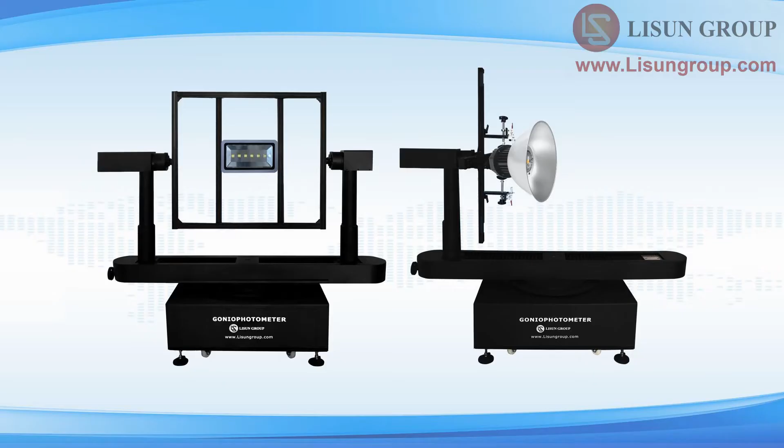Let me introduce to you the installation and use of the LSG-1890B High Precision Rotation Luminaire Goniophotometer. The following is the video catalog. 1. System installation. 2. System adjustment. 3. System calibration. 4. Measurement.

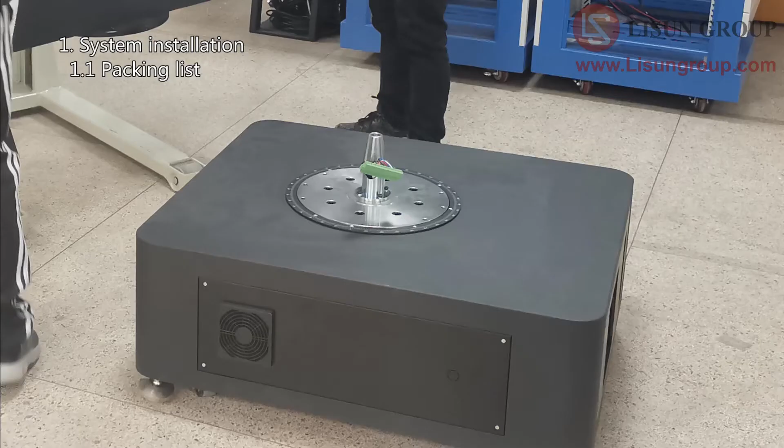Please check the packing list when you receive the shipment. There are 6 boxes in total. 1 box contains the base of the goniophotometer. 1 box contains the turntable of the goniophotometer. 1 box contains the clamps. This is the C-gamma clamp. This is the E27 holder. This is the B-beta clamp.

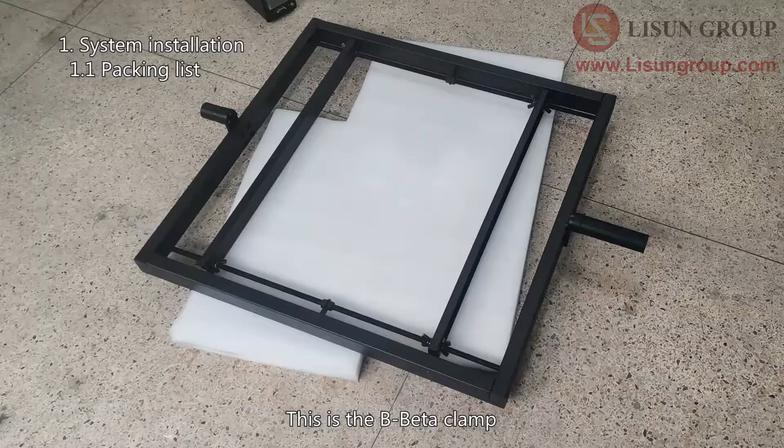1 box contains the cabinet. 1 box contains the AC power source. 1 box contains the DC power supply. All the other small devices and accessories are contained in the boxes described above. Please carefully open all the boxes. Take out all the devices and accessories.

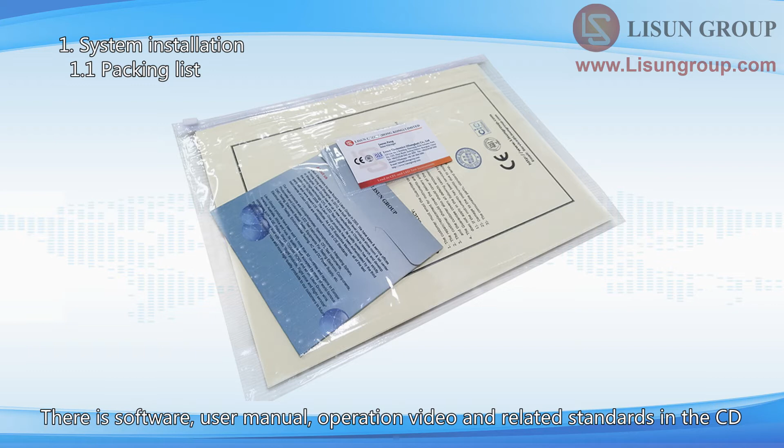There is also a plastic bag in the package that contains a CD, calibration certificates, and guarantee cards. There is software, user manual, operation video and related standards in the CD. Open the back door of the cabinet. There is a wiring diagram on the door.

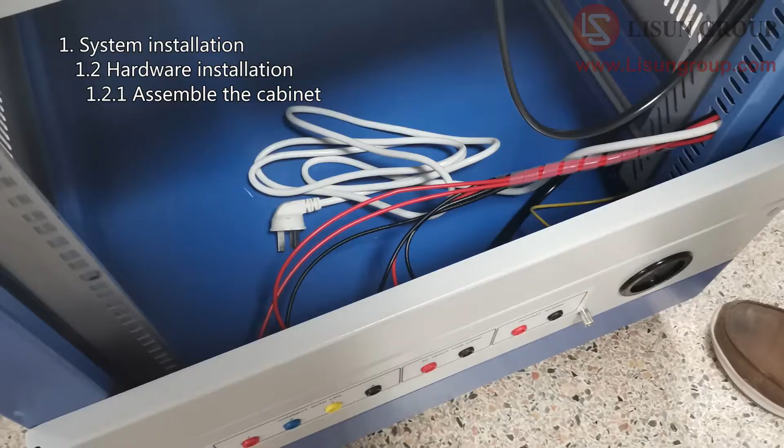Put the digital power meter, rotary actuator controller, DC power supply and AC power source into the correct positions of the cabinet. Here is the power cord for the cabinet. Put it through this hole. There is a fan on the top of the cabinet. Plug the power cords of the fan, digital power meter, rotary actuator controller, AC, and DC power sources to the power strip inside of the cabinet.

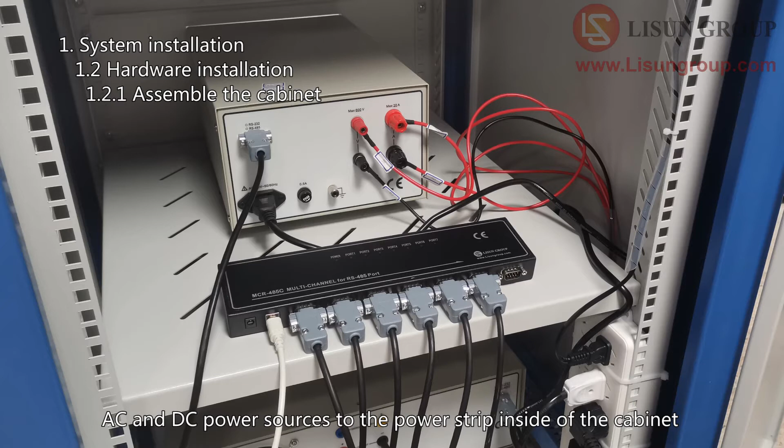Connect the 4 wires to the 4 terminals on the back of the power meter according to the wiring diagram. Connect the communication cable to the communication box. Connect the output lines to the back of the DC power supply. Pay attention to the positive and negative poles. Connect the communication cable to the communication box.

These are the AC power output lines. Connect the output of the AC power source to the cabinet. Connect the communication cable to the communication box. Connect the communication box to the computer using the USB cable.

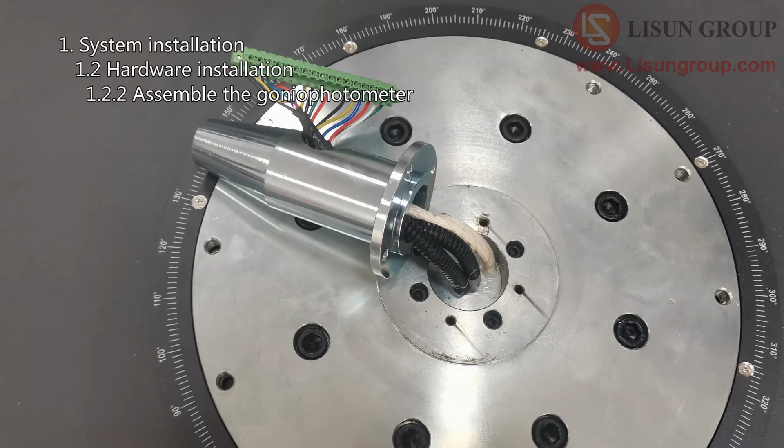There is a taper sleeve on the top of the base of the goniophotometer. The sleeve and the base are engraved with one same number. Make sure the numbers are in the same direction and fix the sleeve to the base using the screws. Open the dust cover of the turntable. There is the terminal bar under the dust cover.

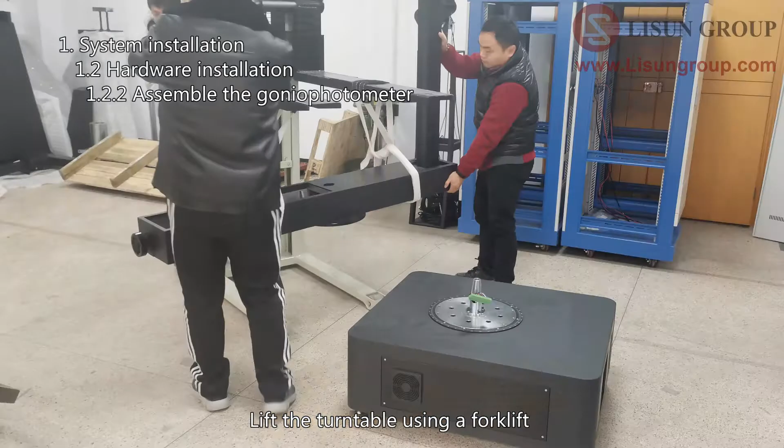Lift the turntable using a forklift. There is also a terminal bar out of the taper sleeve. Make sure they are in the same direction. Put the turntable down on the base slowly. Protect the terminal bar of the sleeve and make sure it goes through the hole successfully.

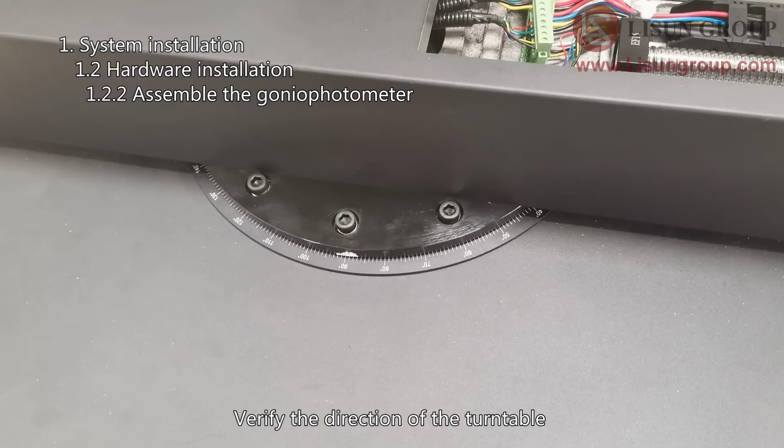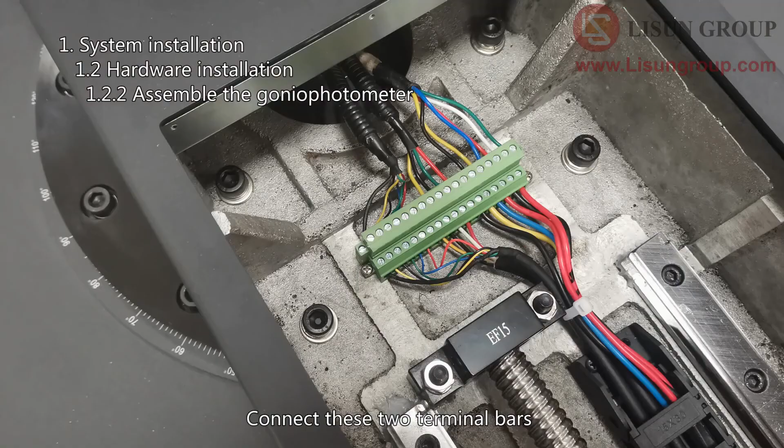Verify the direction of the turntable. Make sure that the 6 screw holes correspond to the base one by one. Fix the turntable on the base using our screws and gaskets. Connect these 2 terminal bars. Put the dust cover to its original position. Move these 4 feet up.

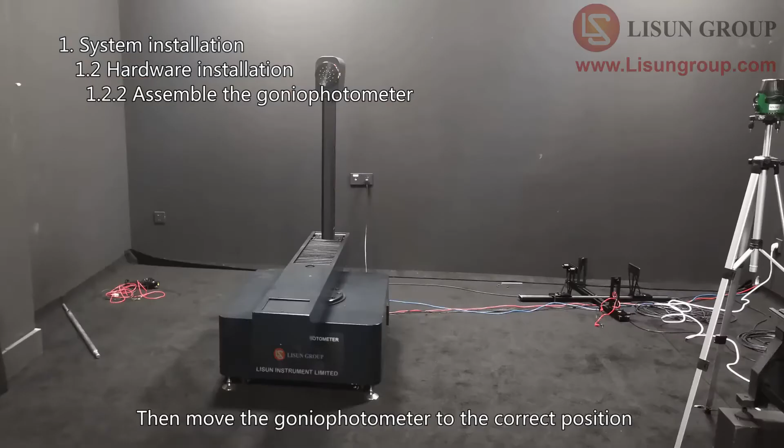Then move the goniophotometer to the correct position according to the darkroom drawing. Try to keep the sides parallel to the wall. The side with the word faces the photo detector. There are 4 terminals marked with numbers on the back of the cabinet. They are used to connect with the goniophotometer.

These 2 terminals are connected to the power strip inside of the cabinet. It is used to power darkroom equipment, including the goniophotometer and photo detector. Then you can control the power supply of the entire system on the cabinet. Connect the grounding terminal to the ground. This is the photo detector and its holder. Assemble it and put it to the correct position according to the darkroom drawing.

There is a 1-to-2 communication cable for the goniophotometer. Connect the RS485 port at one end to the goniophotometer. The other end splits in two. Connect the end with RS485 port to the communication box inside of the cabinet. Connect the other end to the rotary actuator controller inside of the cabinet.

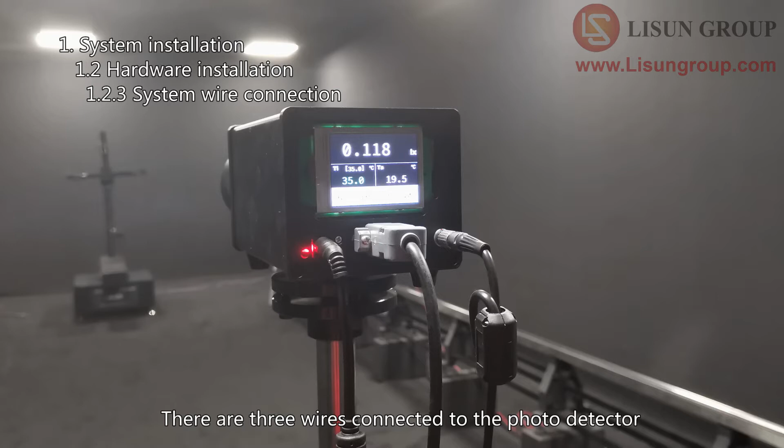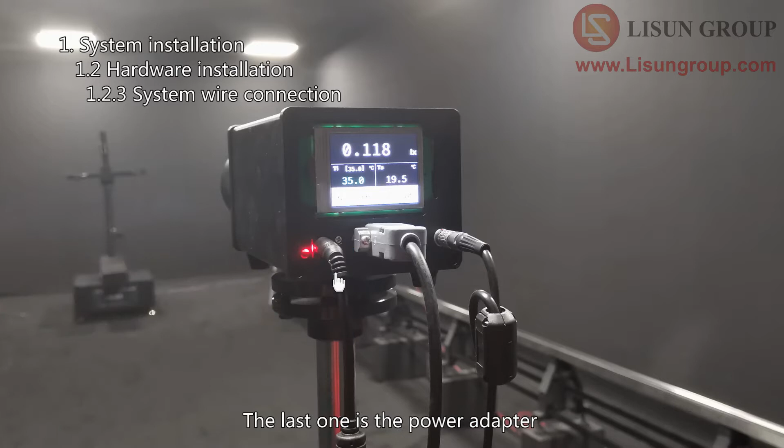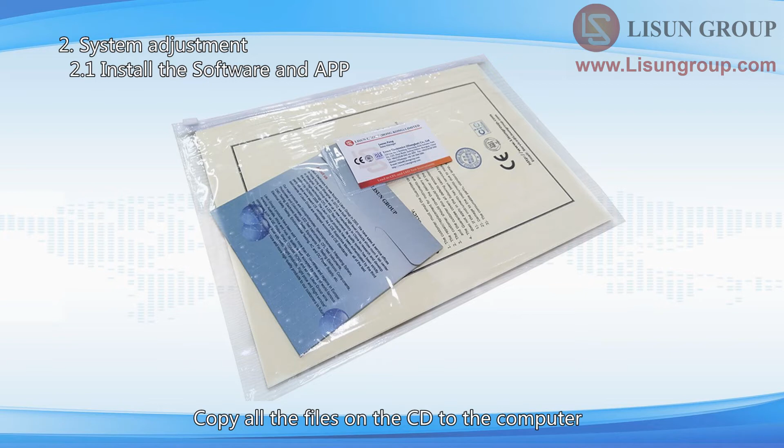Turn on the system. And make sure that all the devices in the system are turned on. Copy all the files on the CD to the computer. Double-click to install the goniophotometer software. Double-click to install the driver for the communication box.

Copy the APK file to your Android phone and install it. Turn on the Bluetooth function of the phone. Open the app. Click here to connect the goniophotometer. The app is used to rotate the goniophotometer, but it can't run a measurement. The function of the app is the same as the rotary actuator control panel of the software. Let's take software operations as an example.

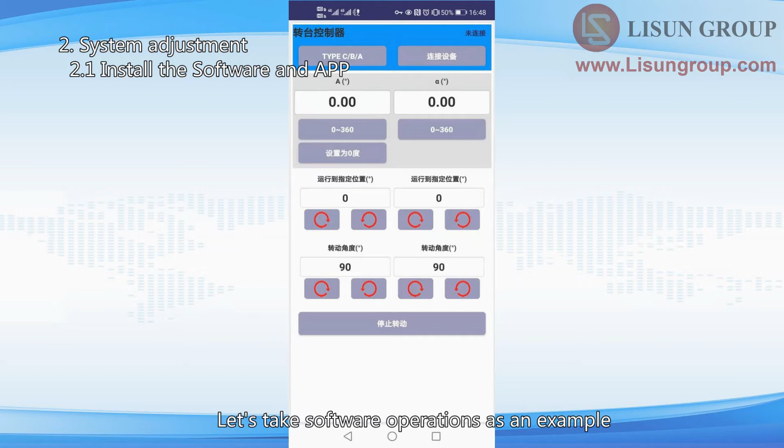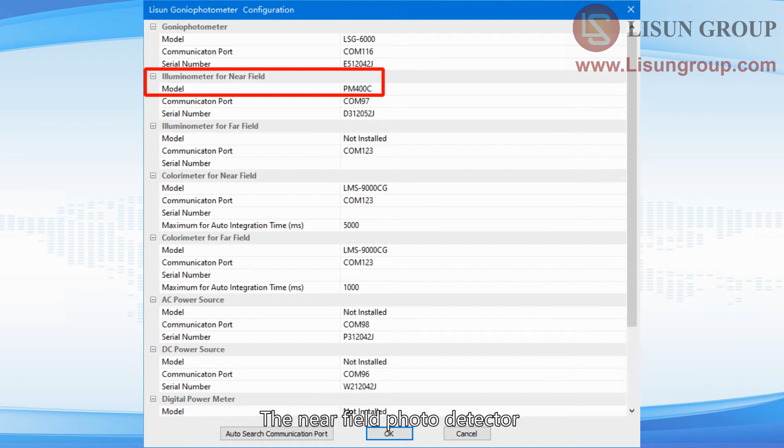When you run the software for the first time, it will automatically enter the configuration interface. Choose the correct models for the devices. The goniophotometer, the near-field photodetector, the AC power source, the DC power source, the digital power meter.

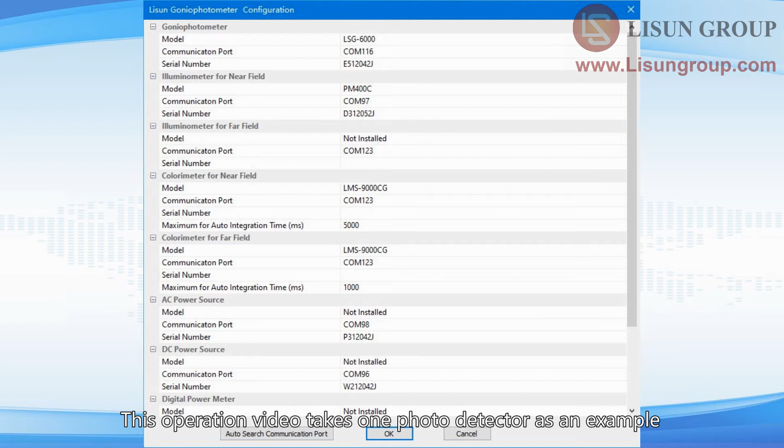If you only have one photodetector in the darkroom, the default is near field. This operation video takes one photodetector as an example. Select Not Installed for the far field photodetector, the near and far field spectroradiometer. Click Auto Search Communication Port when all are selected correctly.

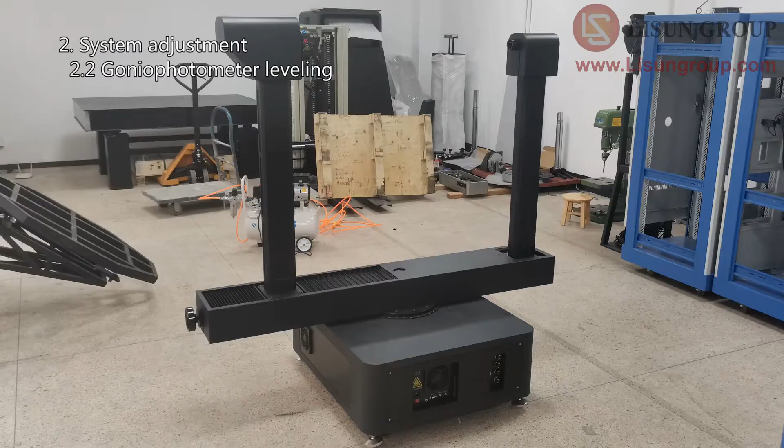After successful configuration, a window to save the file will pop up. Please choose the path of the file, and input the file name. This file is used to save all the test history. This arm of the goniophotometer is the auxiliary arm. Remove it. The other one is the main arm.

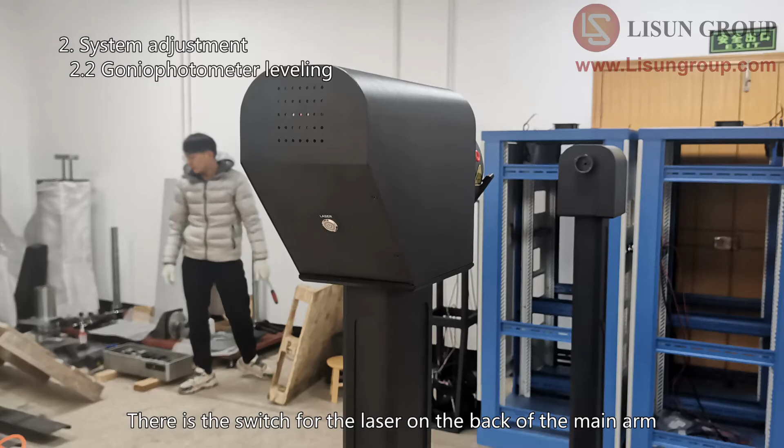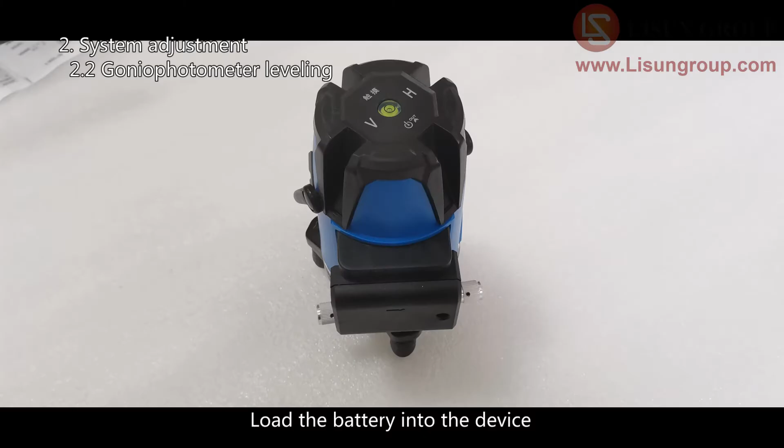There is the switch for the laser on the back of the main arm. Turn it on. Then you can see one laser coming out in front of the main arm. There is a cross laser device inside of this box. Take out the cross laser and its battery. Load the battery into the device. Turn this switch to unlock position. Then the cross laser will be turned on.

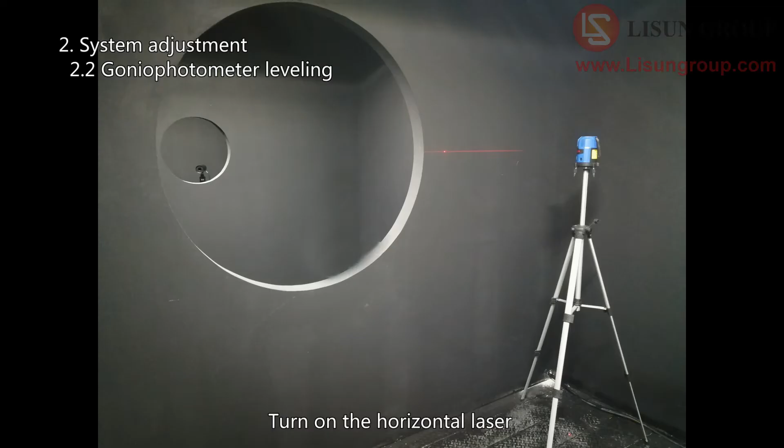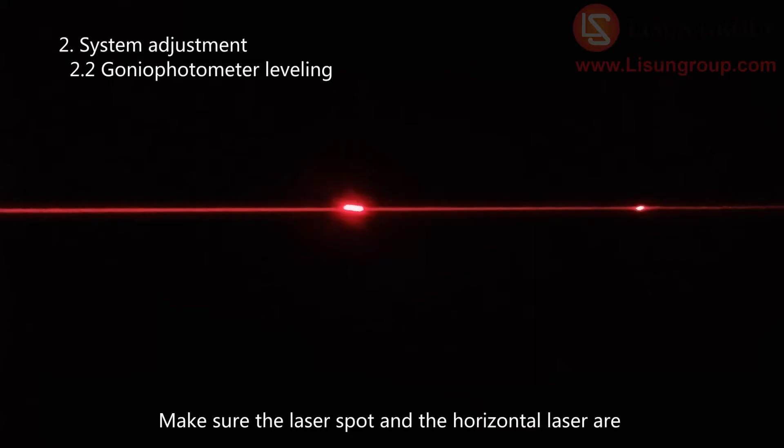Click Rotary Actuator Control Panel. Choose Illuminometer for near field. Click this button to make it rotate continuously. Then you can see the laser spot moving on the darkroom wall. Now you need to rotate the screws to adjust the height of the 4 feet of the goniophotometer. Make sure the laser spot and the horizontal laser are completely coincident within the range of 360 degrees.

All the 4 feet need to touch the ground firmly after the adjustment. Sufficient patience is required to adjust this step. Click the stop button to stop the rotating after the adjustment. Turn the screw up to secure the feet. Choose Illuminometer for near field.

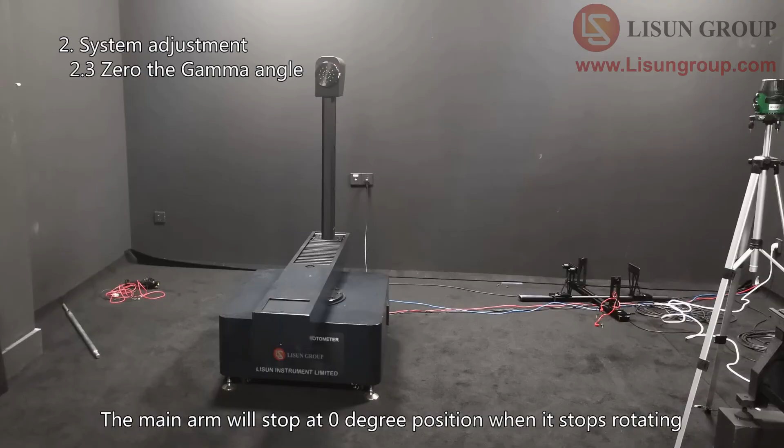Input 0 here. Click any one of these 2 buttons to rotate the goniophotometer. The main arm will stop at 0 degree position when it stops rotating. The laser should go through the center of the hole of the partition. If you have more than one partition in your darkroom, just refer to the last one.

If the laser is not in the center, please input a small number and choose a direction to rotate according to the actual situation. Make sure the laser goes through the center of the hole. Then this is the real 0 degree position of the photodetector. Click Set to 0. The password is LISUN group. It displays 0 at gamma angle after setting 0 successfully.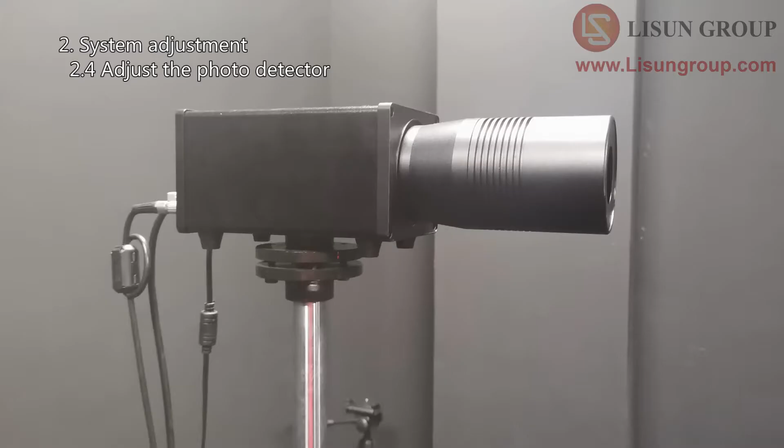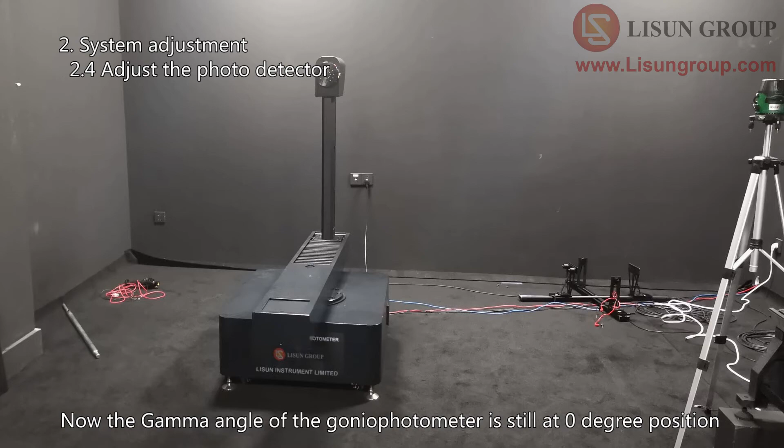Screw down the sleeve of the far detector. Install the mirror tool. Now the gamma angle of the goniophotometer is still at 0 degree position. Please adjust the position of the detector holder, the height and direction of the detector. Make sure that the laser from the main arm of the goniophotometer goes to the center of the mirror tool, and the reflected laser goes to its original position.

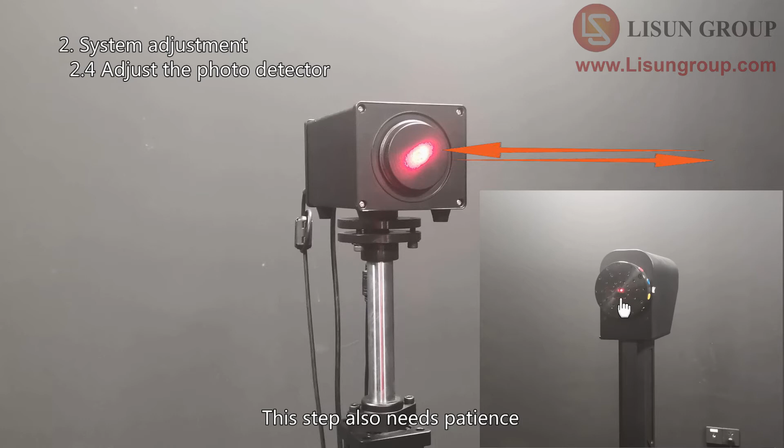This step also needs patience. All the screws should be tightened after the adjustment. Then fix the base of the detector holder to the ground using the screws. You may need to readjust the direction of the detector slightly to make sure that it is still in the correct direction.

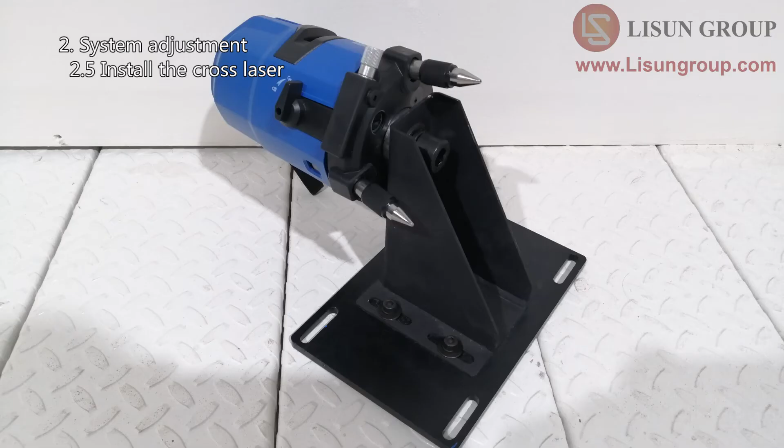After the final adjustment, remove the mirror tool and install the sleeve back. Install the cross laser on the triangular metal support. Check the drawing to confirm which side of the wall to install the cross laser on.

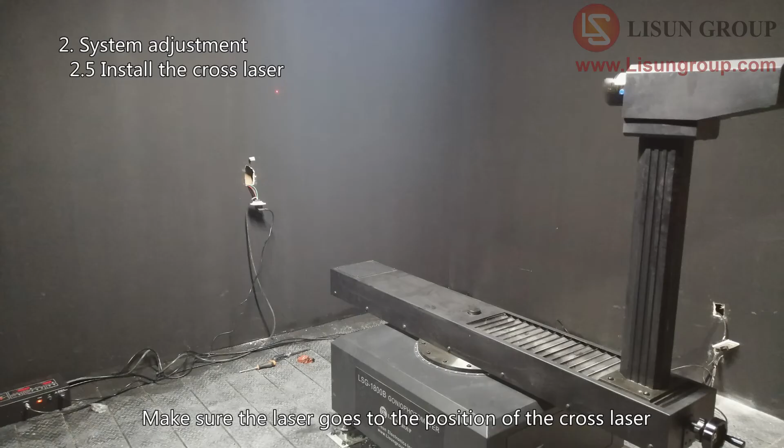Choose Illuminometer for near field. Rotate the gamma angle to 90 degree or 270 degree position according to actual situation. Make sure the laser goes to the position of the cross laser. Turn on the cross laser.

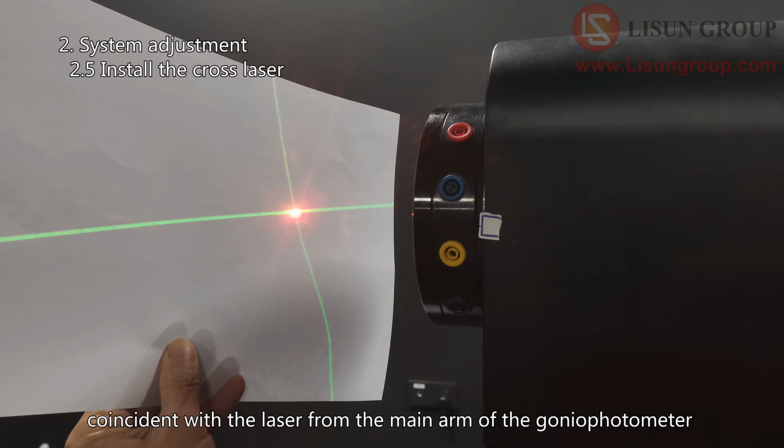Put the triangular metal support on the wall. Adjust the position of the support, the direction of the cross laser. Make sure that the center of the cross laser is completely coincident with the laser from the main arm of the goniophotometer. It should also be noted that the support of the cross laser is in a horizontal state.

If not, the device will sound an alarm. Use screws to fix the support to the wall after the adjustment. You may need to fine-tune the position of the cross laser to make sure that it is still in correct direction. All the screws should be tightened after the adjustment.

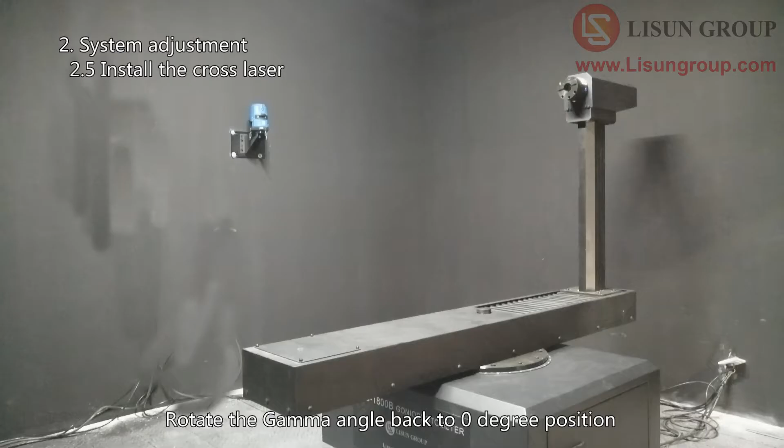Rotate the gamma angle back to 0 degree position. The cross laser beam hit the opposite wall. Make a permanent mark here. The installation and adjustment are finished.

Turn off the power of the system. Clean up the room. The equipment can be covered to avoid dust entering when cleaning.

We need to calibrate the system before using it. First, calibrate the photo detector. Choose Illuminometer for near field.

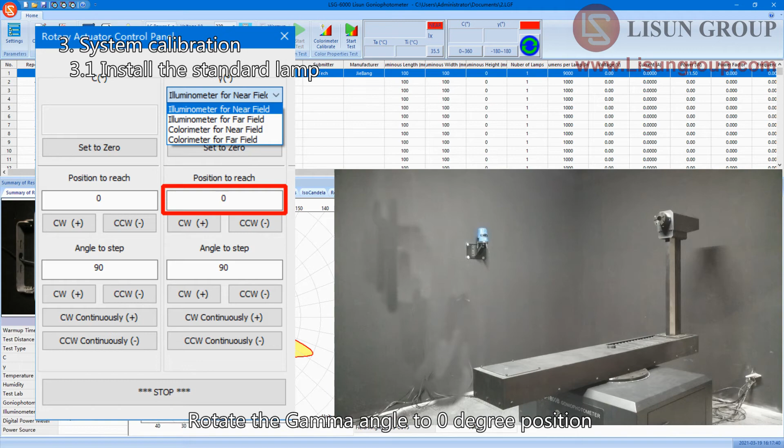Rotate the gamma angle to 0 degree position. Turn on the cross laser and make sure that the laser hit the correct direction. Take out the standard lamp.

Assemble it as shown in the figure. Also install the mirror tool. This is the rod for calibration.

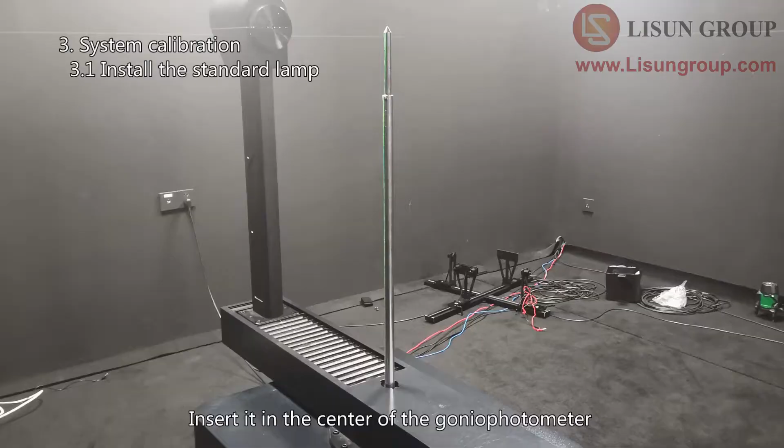Insert it in the center of the goniophotometer. Remove the top section of the rod. Install the standard lamp holder on the top of the rod.

We use 4-wire connections. Use the wires to short the red and yellow terminals, and short the blue and black terminals here. Connect the power wires to the red and blue terminals.

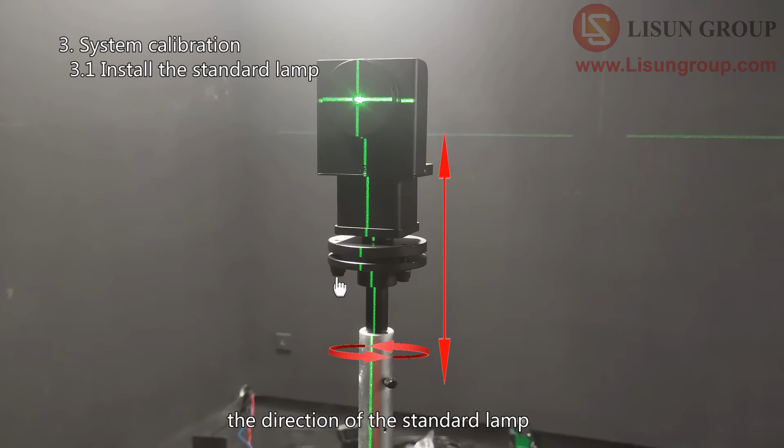Then need to adjust the height of the standard lamp, the direction of the standard lamp. Make sure that the cross laser hit the center of the mirror, and the reflected horizontal and vertical laser coincide with the original horizontal and vertical laser.

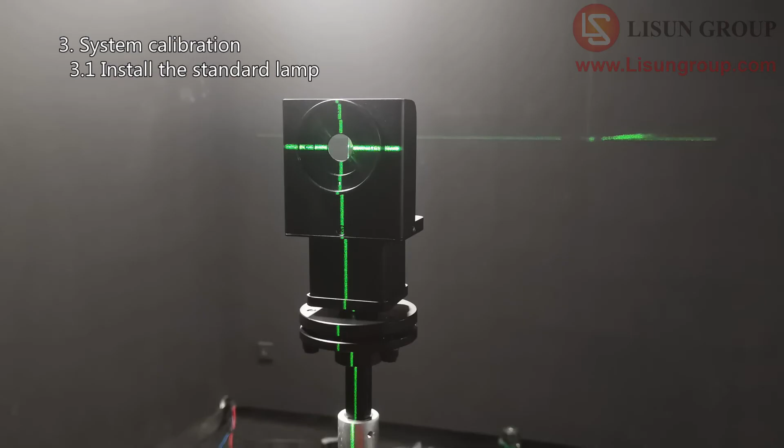Remove the mirror tool. Turn off the cross laser. Remove the cover of the standard lamp. Our standard lamps are constant current DC lamps.

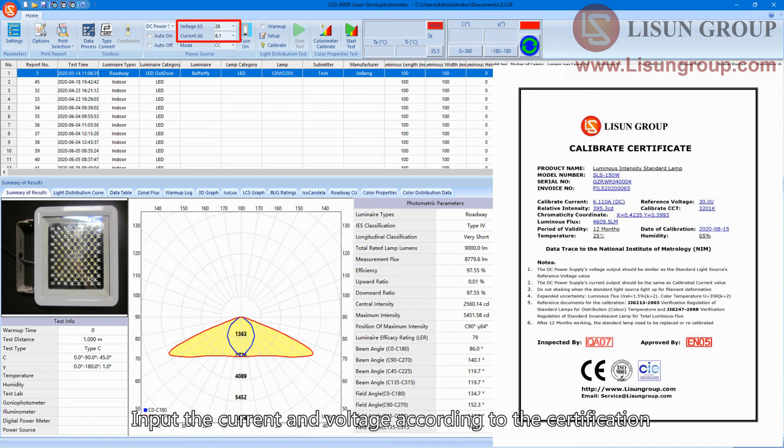Turn the AC-DC switch on the cabinet to DC. Choose the DC mode on the navigation of the software. Input the current and voltage according to the certification. Please note that you need to use CC, constant current, mode.

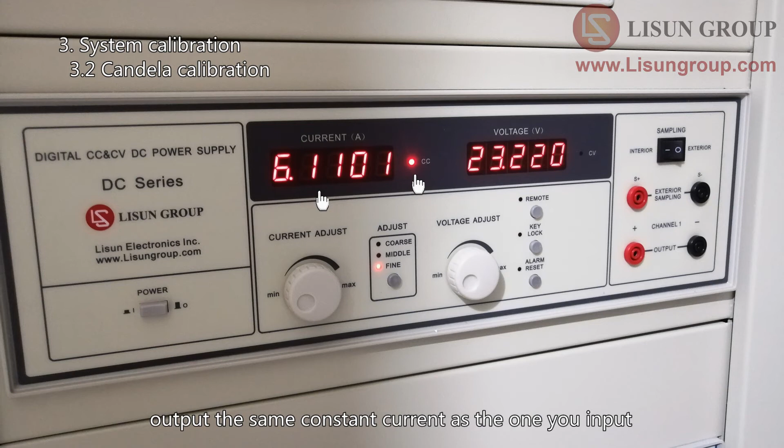Click to turn on the standard lamp. You can also confirm the DC source whether it outputs the same constant current as the one you input. Rotate the gamma angle 90 degrees clockwise or counterclockwise according to the actual situation.

Make sure that the hole of the standard lamp holder faces the photo detector. Turn off the other lighting inside of the darkroom. Close the door of the darkroom. The standard lamp will be stable after about 15 minutes.

Click Photometric Calibration. Choose Illuminometer for near field. We use candela calibration but not lumen calibration. Input the candela here. Click Start.

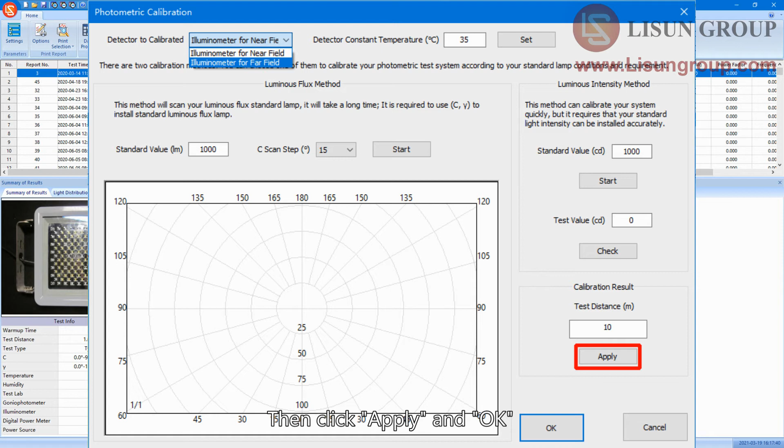Then the test distance will change automatically according to your darkroom size. Then click Apply and OK. Turn off the standard lamp after all the calibration. After the standard lamp cools, put it back to the box for safekeeping.

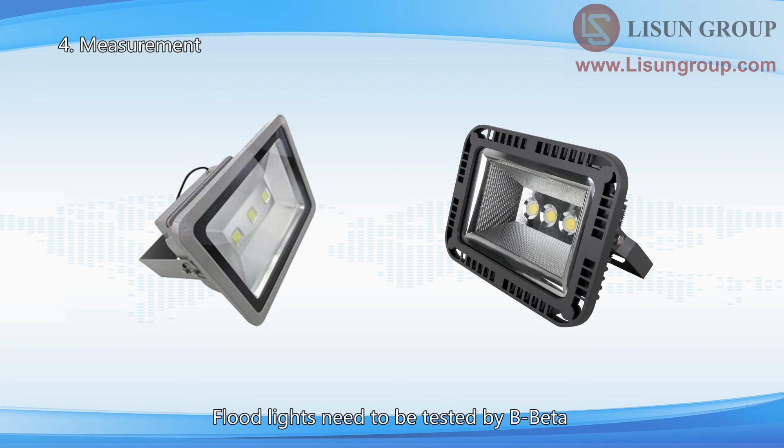According to the standards, car lights and traffic lights need to be tested by A alpha. Flood lights need to be tested by B beta. All the other lights need to be tested by C gamma.

LSG-1800B can do B beta and C gamma test. LISUN provides 2 clamps for C gamma test. The big cross clamp is used for big luminaires. The E27 holder is for bulbs.

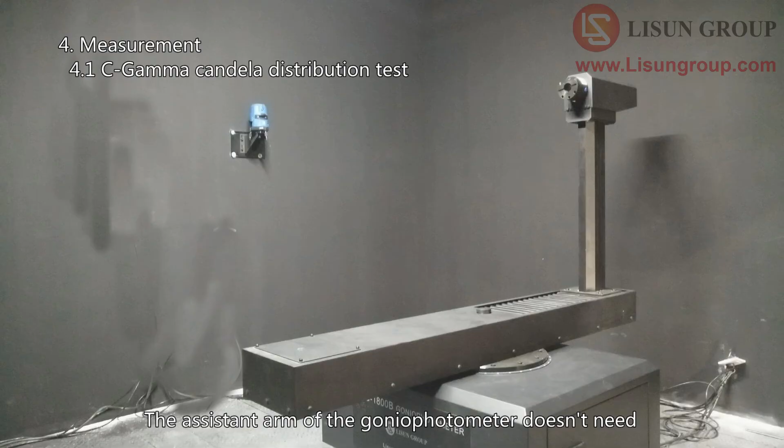The assistant arm of the goniophotometer doesn't need to be installed back for C gamma test. Turn on the cross laser and make sure that the laser hit the correct direction. Install the clamp on the main arm of the goniophotometer.

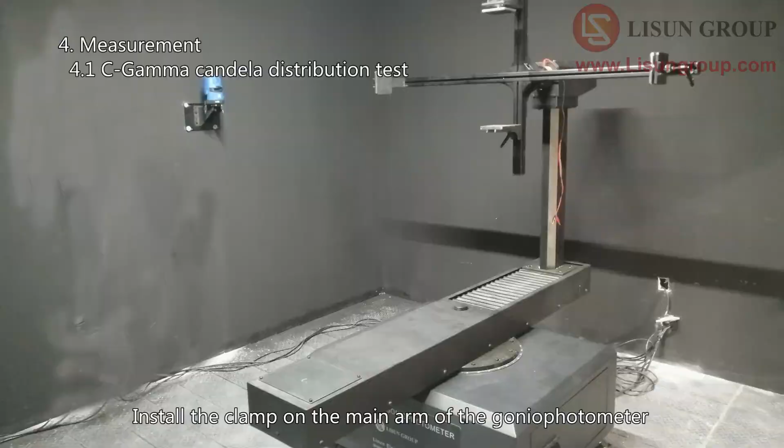Choose Illuminometer for near field. Rotate the gamma angle 90 degrees clockwise or counterclockwise according to the actual situation.

Make sure that the cross laser faces the clamp. Install the luminaire to the clamp. Refer to the cross laser, and make sure it hits the center of the luminous surface of the luminaire. Make the luminous surface of the luminaire parallel to the clamp.

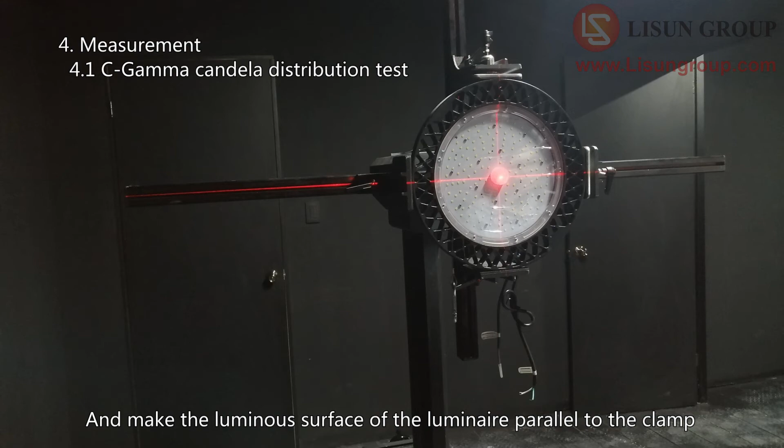Rotate the gamma angle back to 0 degree position. Loosen the lock and rotate it to align the luminous interface with the position of the vertical laser of the cross laser. Lock it again. Turn off the cross laser.

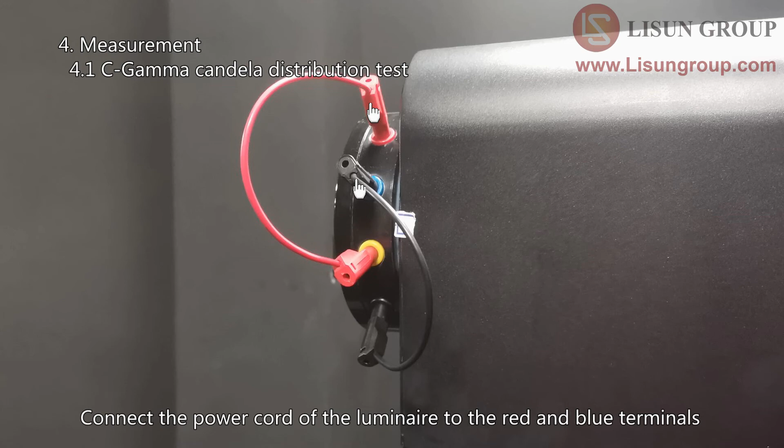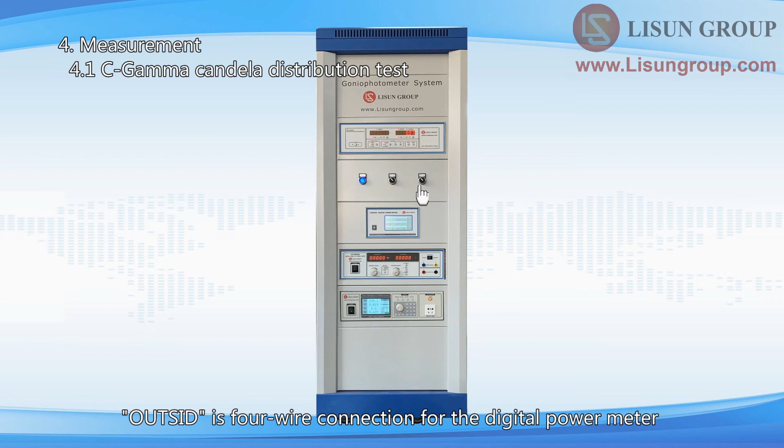Connect the power cord of the luminaire to the red and blue terminals. Change the AC/DC switch on the cabinet to the correct position. Keep this switch to the outside position. Outside is 4-wire connection for the digital power meter.

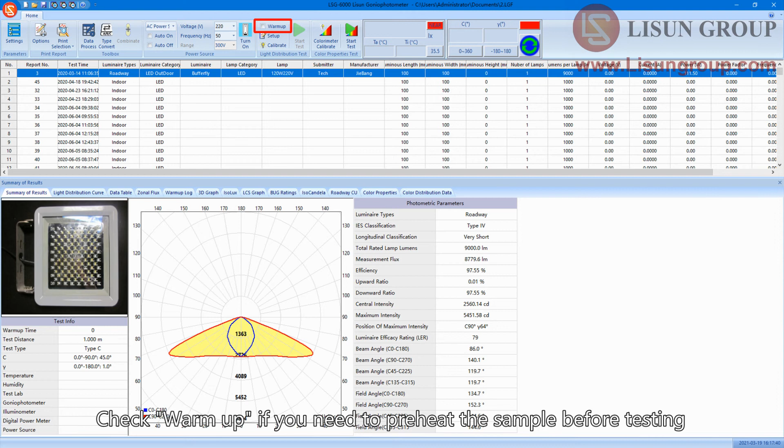Choose the correct model of power source and input the correct voltage and current. Turn on the sample. Click Setup. Set warm-up parameters. Check warm-up if you need to preheat the sample before testing. Click Start Test.

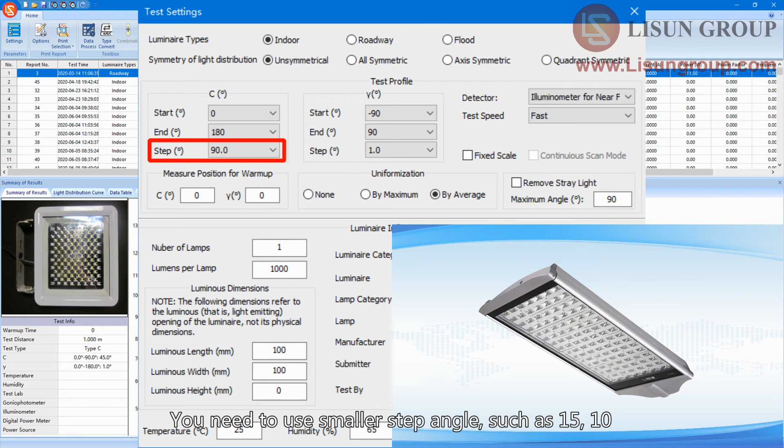No need to change. If the luminaires are symmetrical in theory, you can use a bigger step angle, such as 22.5 or 30. Some luminaires are not symmetrical, such as roadway lights, so you need to use a smaller step angle, such as 15 or 10. In summary, the smaller the step angle selected, the more accurate the test data will be, but the longer it will take. Test range for gamma angle has 2 options.

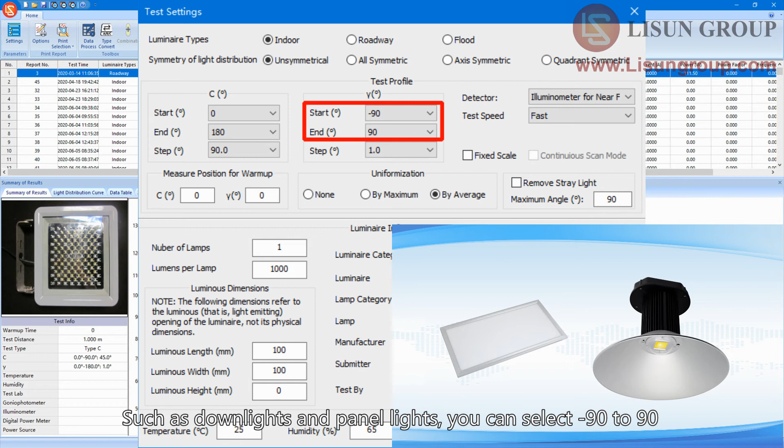-90 to 90, and -180 to 180. For luminaires with a light angle less than 180 degrees, such as downlights and panel lights, you can select -90 to 90.

Otherwise, such as bulbs or tubes, you need to select -180 to 180. Choose 1 degree for the gamma step angle. If you choose a bigger step angle, the candela distribution curve may be an uneven broken line.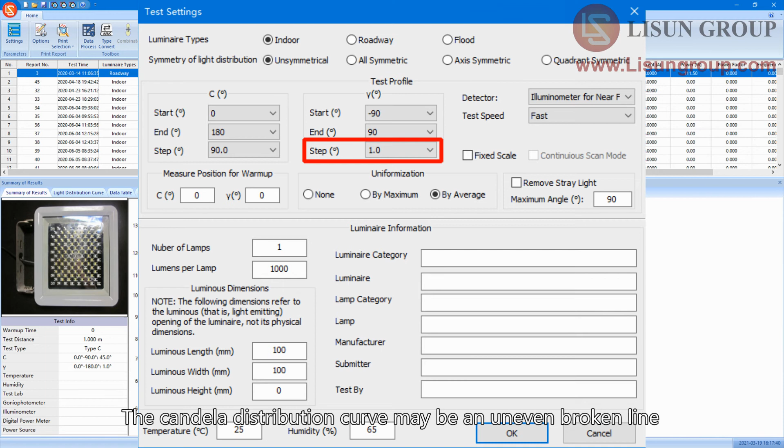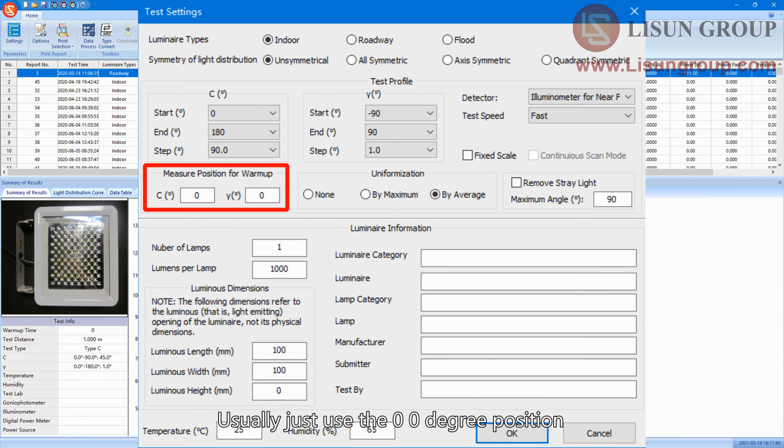Choose the correct photo detector that you use if you have more than one photo detector. Choose the test speed; usually fast speed can be used. Scale is not important, you can choose fixed scale. Input the angle to be monitored during the preheating. Usually just use the 0 degree position.

Select the uniformization option, then all the C angles at 0 degree gamma angle candela values will be the same. You need to check uniformization to ensure that the exported IES files can be recognized by most other lighting design software. If you want to remove stray light beyond some angle, check Remove Stray Light and input the angle.

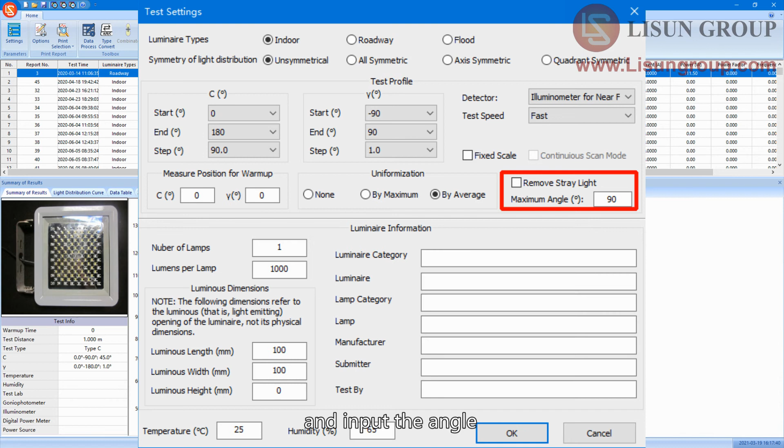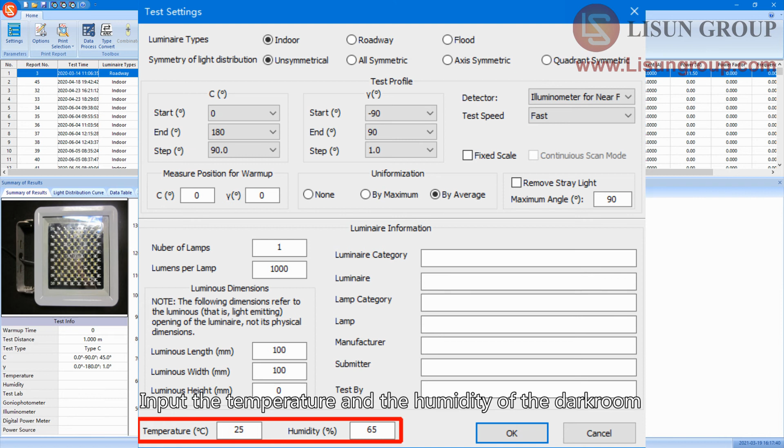Input the number of light sources and the rated lumen of each lamp. If you don't know, just leave it blank. Input the luminous dimensions. Input the information of the sample. Input the temperature and humidity of the darkroom. Click OK to enter the preheating interface. If you did not check warm up, it will enter the testing interface directly.

Click here to change the angle to B beta. Click Rotary Actuator Control Panel. Rotate both B and beta angles to the 0 degree position.

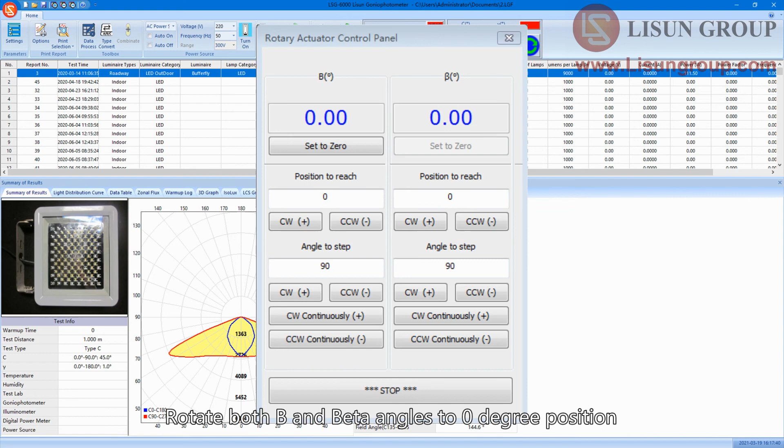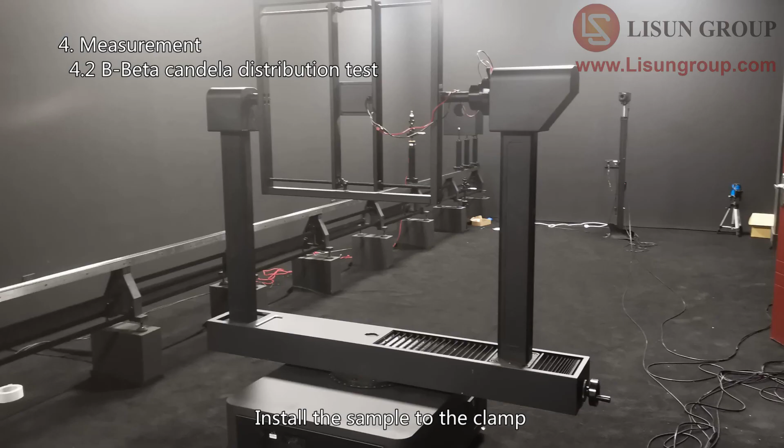The assistant arm needs to be installed back if you do a B beta test for floodlight. Then install the B beta clamp to the goniophotometer. Make sure it's vertical. Install the sample to the clamp, and the luminous surface should face the photo detector.

To ensure that the luminous surface is in the center of the goniophotometer, you also need to rotate the beta angle to make the cross laser hit the luminous surface, and adjust the position of the sample to make sure the cross laser hits the center of the luminous surface. Use the same method to turn on the sample.

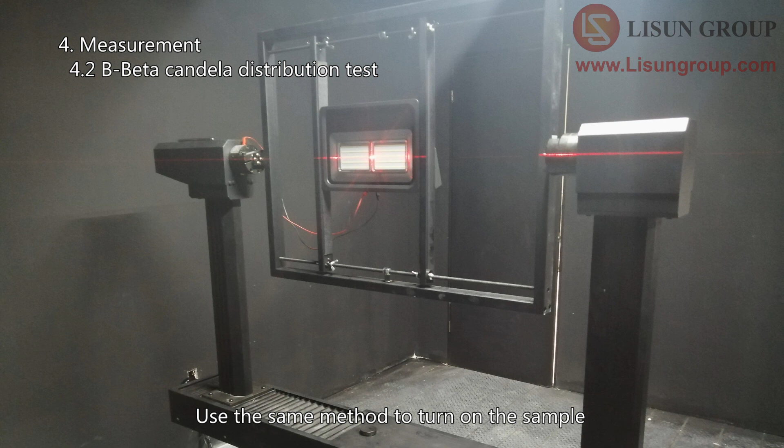Click to enter the test settings. Choose flood for luminaire types. Then the test method will change to B beta. Set the range of B and beta as -90 to 90, no need to change.

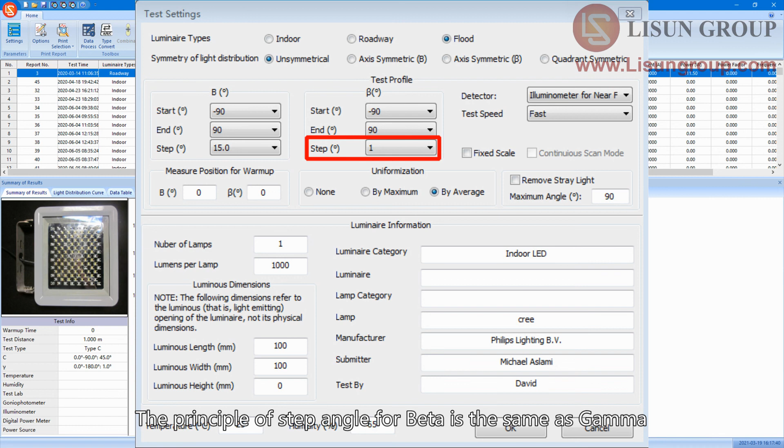The principle of step angle for B is the same as C. The principle of step angle for beta is the same as gamma. All the other settings are the same as C gamma. Click OK to start the test.